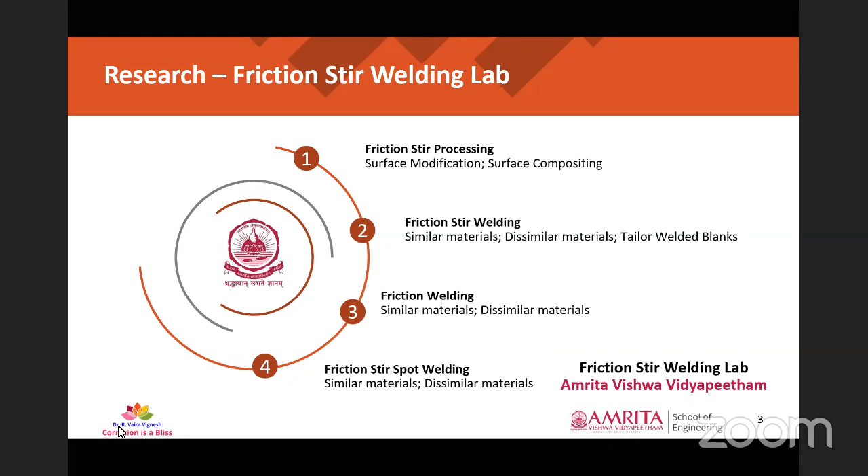The next lab I am associated with is the Materials Processing Lab, established with support from Amrita Vishwa Vidyapeetham, the Department of Space, and ISRO. We have facilities for powder metallurgy of materials, fabrication of ceramic tiles and ceramic polymer pavement blocks, and facilities for hot rolling and cold rolling of materials. Besides this, we work on vacuum brazing of materials. Dr. M. Govindaraju sir is an expert in vacuum brazing of ceramics to alloy, and he currently has 2 research-funded projects live in the lab.

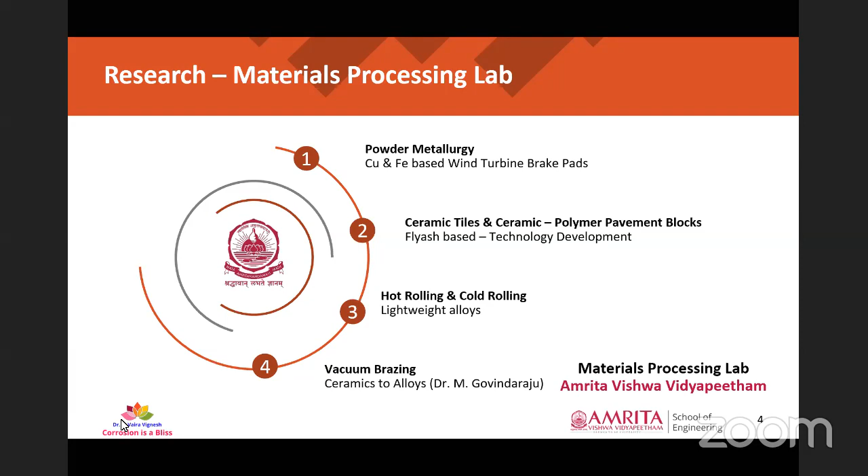These are the facilities we have in our lab: friction stir welding and processing setup, immersion corrosion setup with thermostatic bath, continuous casting setup, multi-purpose heat treatment furnace, vacuum brazing furnace, high vacuum brazing furnace, high frequency induction furnace, rolling mill, ball milling unit, foil rolling unit, and conventional tribometer setup. These are established with funds from ISRO, the Department of Science and Technology, the Department of Space, and Amrita Vishwa Vidyapeetham.

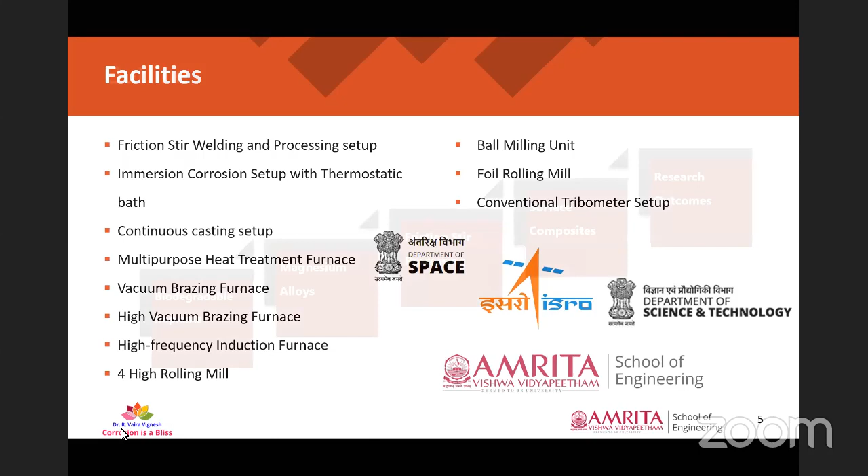With this brief introduction, I'll move into today's topic. I'll begin with an introduction to biodegradable implants and the need for implants with respect to magnesium alloys. Then we'll discuss the surface composite concept, followed by the research outcomes based on AZ91 alloy reinforced with nanophase silica particles.

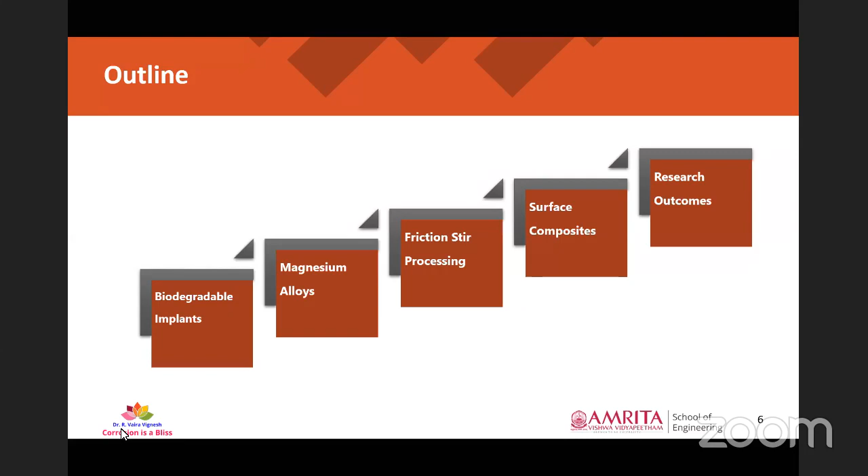A base introduction to biomedical implants and magnesium alloys.

Implants are materials engineered to interact with biological systems. They are utilized for hard tissue or bone fracture based applications, substituting and supporting the functionalities of the damaged bone.

Conventionally, implants are made of polymeric, ceramic, or metallic materials. A few polymeric materials used for implant applications include polyethylene, polyketones, polylactide, and PGA based derivatives. The problem with these polymeric implant materials is their limited biocompatibility.

Coming towards ceramic materials, alumina, silica, zirconia, and hydroxyapatite based ceramic materials are into the picture if we want an implant material based on ceramics. But the problem with ceramics is their machinability.

Coming towards metallic implant materials, researchers and medical people have been using stainless steel based, chromium, tungsten, and titanium based alloys for implant applications.

However, when we check the properties of these conventional materials with the bone, given in the table here, we could observe that the density, compressive yield strength, and Young's modulus of these conventionally used metallic implant materials are very much higher than that of the bone.

If we place a material that has undesirably high strength and high Young's modulus, it will create a high tendency for the implant material to absorb the stresses transmitted to that specific area of the body, and this will induce a body mechanism to reabsorb the developing bone material, which deteriorates the bone density of the developing bone.

This accretive process, that is the tendency of the implant material to absorb stresses and the induction of the body mechanism to reabsorb developing bone material, will lead to loosening of the implant and bone refracturing. This effect is called the stress shielding effect, so it is not desirable at all.

Added to that, these implants are always non-biodegradable, meaning they will not corrode inside the human body. For example, it can be stainless steel, titanium, or any other material—it will not degrade in vivo. So there is a need for secondary revision surgery after the bone heals completely.

Added to that, since these are non-biocompatible elements—for example, titanium and stainless steel are not biocompatible—in the case of stainless steel, iron and chromium are the ions released. If they corrode or make wear debris, they are non-biocompatible, and that will release toxic ions in the vicinity of the implants, leading to inflammatory osteolysis.

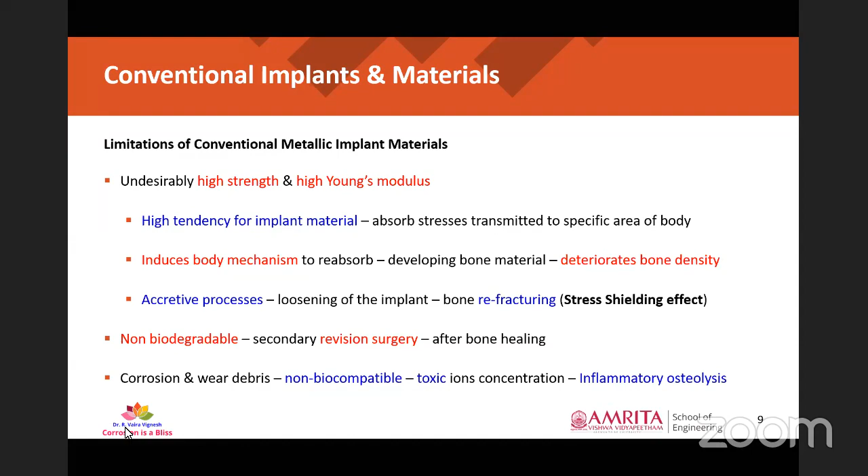Coming towards biodegradable concepts, people have been working on these biodegradable concepts right from the 1850s, and these biodegradable implants should have the inherent ability to corrode in the human physiological environment.

But the problem with currently used biodegradable implants is they prematurely fail before the bone heals completely. So we have to develop a material with an elongated dissolution period, so that the bone healing period and the biodegradable implant's dissolution meet at an exact point. We must ensure the implant has gradual loss in material and mechanical strength during degradation, balanced by the increasing strength and stability of the newly forming bone.

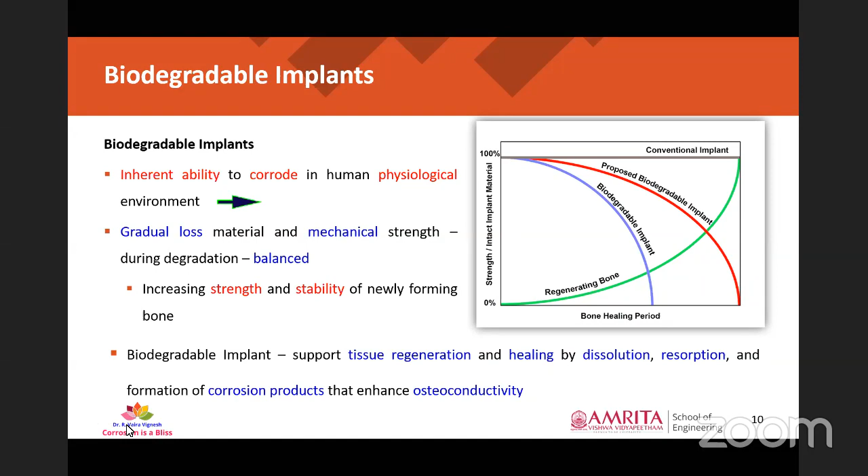When we consider these factors, magnesium has many advantages over conventional materials. First is density, compressive yield strength, and Young's modulus. The density of human cortical bone and magnesium alloys are very similar, and the compressive yield strength and Young's modulus are also very similar to magnesium alloys in most cases. This equivalent compressive yield strength, Young's modulus, and density will give us only marginal stress shielding effect if implanted in the human body.

Magnesium has an inherent ability to corrode in the human physiological environment, which is rich in chloride ions. Even so, this creates magnesium ions, which are cofactors of more than 325 enzymatic reactions within the human body, ensuring proper functioning of internal organs. The serum magnesium levels are maintained by dynamic absorption and excretion equilibrium mechanisms within the body. The World Health Organization recommends a daily intake of 280 to 300 milligrams of magnesium-based salts for adults and 250 milligrams for children.

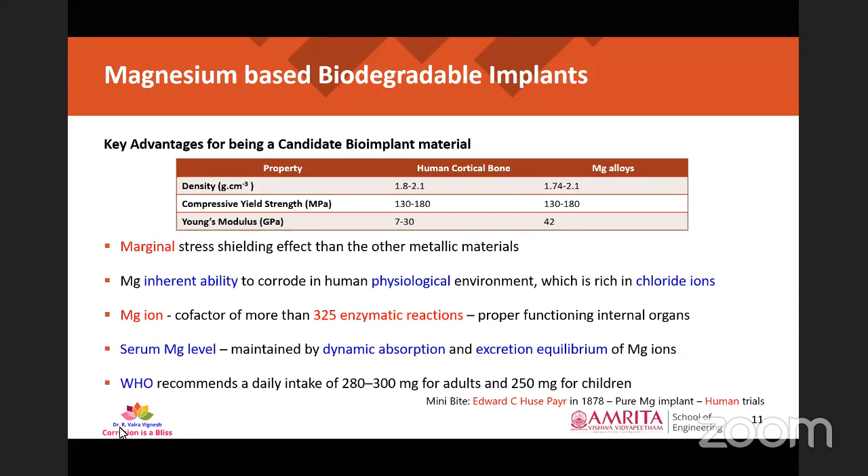This led to research towards biodegradable implants with controlled corrosion kinetics in magnesium alloys. The challenge of magnesium alloys for bioimplant applications is its HCP structure, which limits the workability of the material since the slip systems are very limited. Additionally, it is a highly active metal resulting in high corrosion rate, and its low density results in high wear rate too. Magnesium has a density of around 1.7 grams per cc.

Coming to the corrosion perspective, magnesium alloys corrode rapidly at a pH of around 7.2 to 7.4, the pH of physiological fluids, at a rate of 4 to 8 mm per year. But the recommended corrosion rate for biodegradable implants is around 0.5 mm per year. At a corrosion rate of 4 to 8 mm per year, this results in accumulation of hydrogen gases in the tissues, which is a lethal phenomenon.

So we need to develop a process or a composite that will engineer the corrosion properties of the materials. The bioimplant recommended corrosion rate is less than 0.5 mm per year. So we have to develop a process or composite to engineer the corrosion properties.

The limitations with these magnesium alloys also have to be considered while we choose a process or plan for fabrication of a composite material.

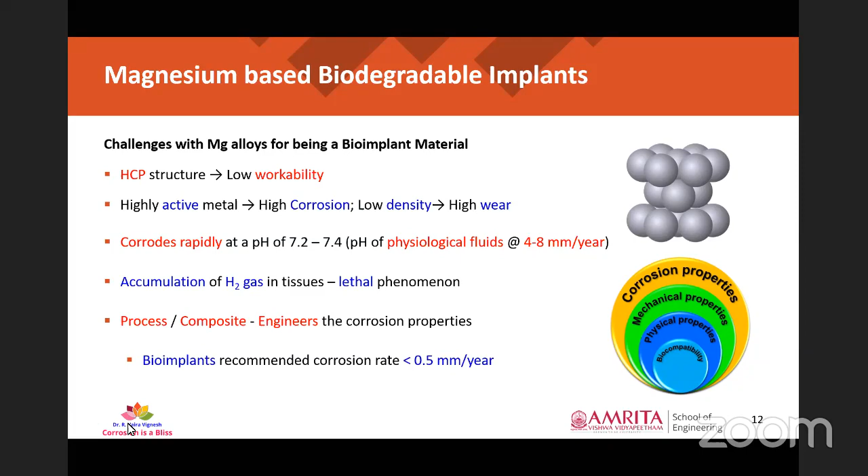Among the magnesium alloys, my research topic will include AZ91, which is a magnesium aluminum alloy system. Earlier researchers have shown that this specific grade of magnesium aluminum alloy system has good biocompatibility and corrosion resistance in vivo environments.

In vivo animal studies, in vivo based corrosion rate experiments indicated that the corrosion rate of AZ91 is less than the in vitro corrosion rate, which is based on some cell culture based experiments.

So in this study, we have taken a wrought AZ91D alloy of thickness 4 mm, whose composition is given here. AZ91, as you know, is magnesium 90%, aluminum around 9%, and zinc 1% approximately. This is the spectrometer reading showing the composition of wrought AZ91 alloy purchased from the market.

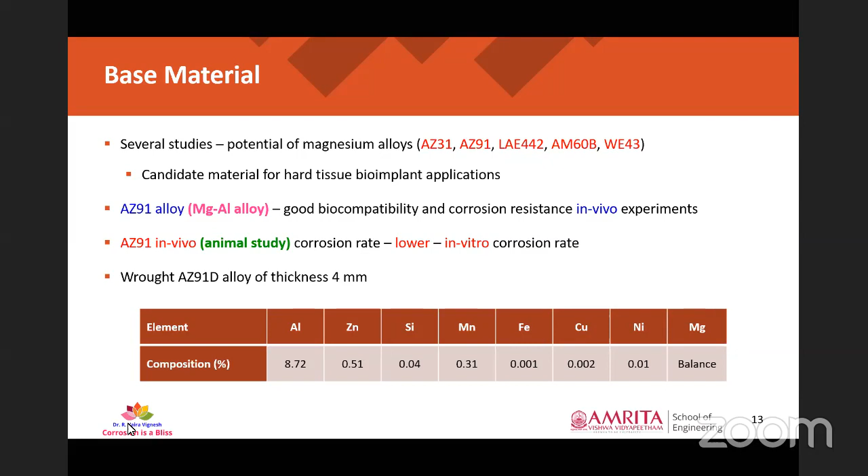So we are going ahead with fabrication of composite using this material. Let us see the phases present in this magnesium aluminum alloy system so we can conclude how it could be done, and what parameters we should consider while fabricating magnesium aluminum based surface composites.

The solubility of aluminum in magnesium is very limited, and we can see from the phase diagram that only 11.5% of aluminum dissolves at eutectic temperature. Beyond this solubility limit, magnesium 17Al12, a brittle intermetallic precipitate, comes out of the alloy, and that is thermally unstable too.

Coming towards corrosion perspective, the alpha magnesium, the primary phase of the alloy, has corrosion potential of minus 1.81 volt against saturated calomel electrode in Hank solution, and the beta phase, the secondary intermetallic phase present in AZ91 alloy, has corrosion potential of minus 1.08 volt against saturated calomel electrode in the same Hank solution.

So when two phases are present in the matrix with wide gap in corrosion potential, this leads to galvanic coupling effect, which in turn leads to intergranular corrosion effects too. So we have to ensure the intergranular corrosion effect is minimized while we fabricate surface composites. We have to consider this point of view also.

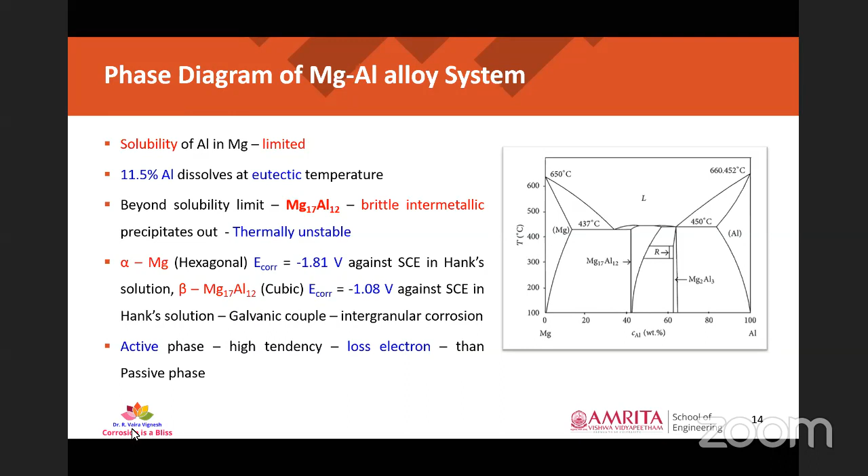Coming towards its soft matrix and HCP structure, it is prone to high wear rates. Added to that, the HCP structure restricts the deformation of the alloy too.

Coming towards tensile behavior, it has a soft matrix, and this soft matrix grain size will determine the tensile strength of the alloy. So if we want to improve the tensile characteristics, we have to opt for grain refinement techniques too.

Coming towards biocompatibility, that is a plus point for us because magnesium is the second most abundant element in the human body, and excess is excreted through body fluids.

When we combine these factors like tensile and corrosion, that gives us stress corrosion cracking; corrosion and wear gives tribo corrosion; and tensile behavior combined with biocompatibility comes with stress shielding effect.

These characteristics are all dependent on the microstructure of the alloy, which consists of alpha phase and beta phase. The alpha phase is the primary phase of AZ91, which is alpha magnesium, and the beta phase is an intermetallic of magnesium and aluminum in the alloy itself.

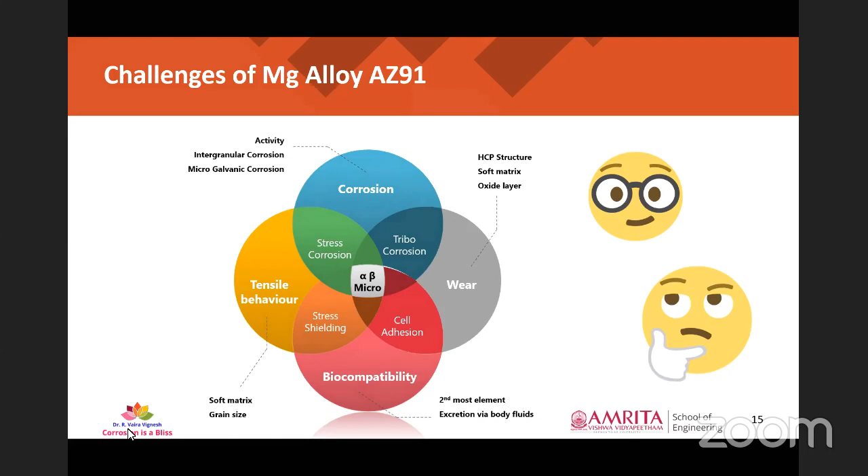And we'll discuss the solid state processing technique, that is friction stir processing technique, to fabricate surface composites out of magnesium alloy AZ91.

Coming towards friction stir processing, it is a solid state processing technique, because we process the material well below its melting point. Added to that, it is a green process too.

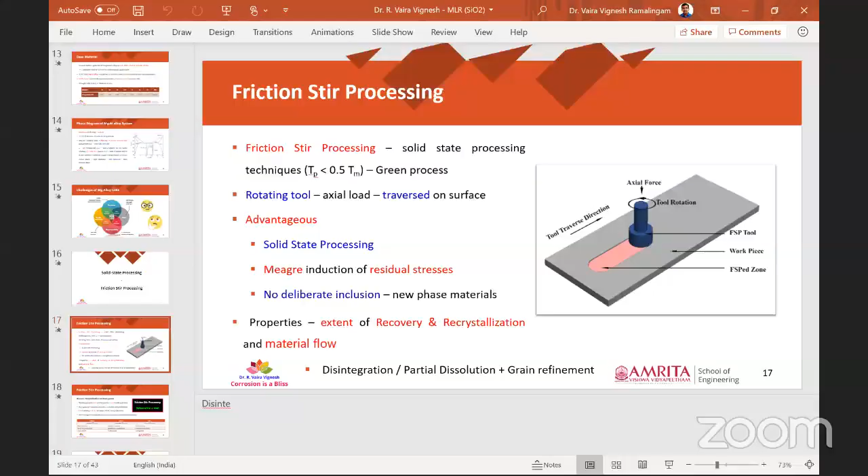Yes, can I go ahead with this FSP? Yes, yes, sir. Yes, ma'am.

So the disintegration and partial dissolution happens. Why? Because there is recovery and recrystallization phenomenon taking place in the material.

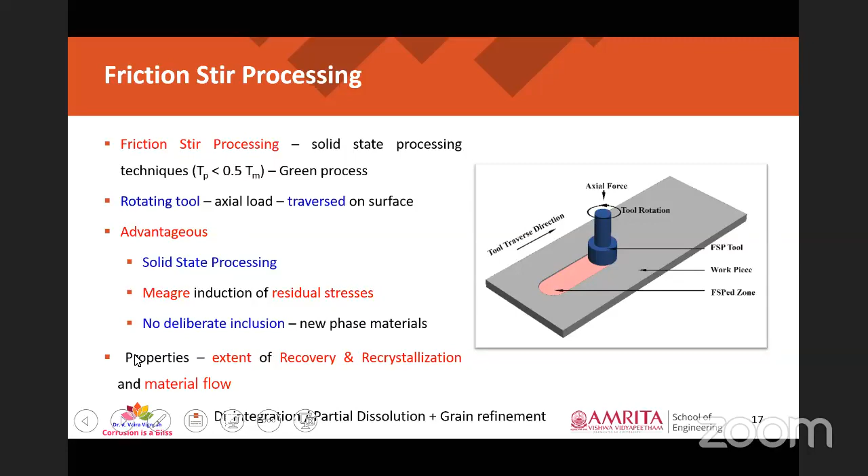Coming towards the recovery, recrystallization, and grain growth process that happens in FSP, we can differentiate it into three zones. One is exactly beneath the FSP tool, which undergoes dynamic recovery, dynamic recrystallization, and grain growth. The zones ahead and behind the FSP tool are subjected to static recovery, static recrystallization, and grain growth phenomenon.

Generally speaking, materials working processes could be classified as hot working and cold working. In hot working, grain structure refinement happens through heat input, and in cold working, through strain. In hot working, dynamic recovery and dynamic recrystallization take place, and in cold working, static recovery and static recrystallization take place.

But FSP is unique. Why? Because we introduce heat and strain into the matrix simultaneously, so that dynamic and static based recovery and recrystallization phenomena take place in the material simultaneously. This is the greatest advantage of this FSP process.

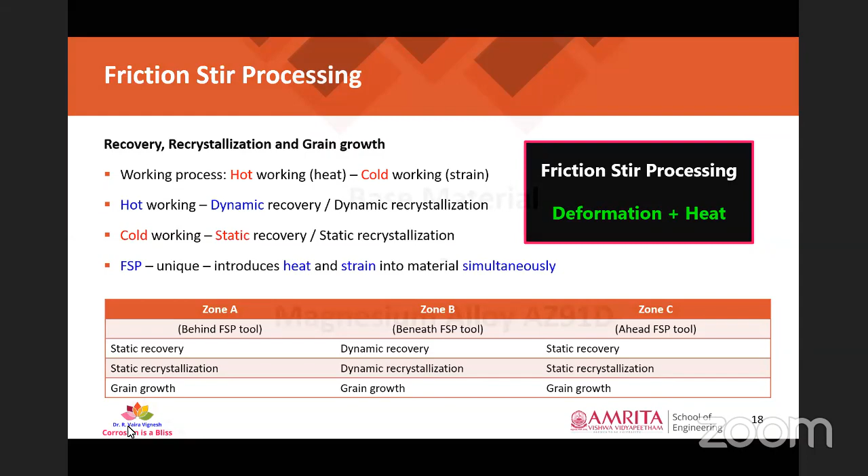So we'll be using this process to fabricate surface composites out of magnesium alloy using nanophase silica particles. Even before that, we'll discuss the properties of the base material, that is magnesium alloy AZ91D.

Coming towards the microstructure observed under a normal microscope, we could see alpha phase and beta phase in the alloy. The alpha phase appears as a bright region, and the beta phase appears as a dark region in the optical microscope after etching.

We have done some XRD analysis to confirm the phases present in the matrix. The XRD analysis confirmed that there are only two predominant phases in AZ91 alloy: alpha magnesium, which is the primary phase, and the intermetallic phase between magnesium and aluminum, beta magnesium 17 Al12. So these are the two phases present in the alloy.

The micro hardness of this alloy in the as-fabricated state is around 57.9 HV, that is Vickers hardness of 57.9 HV.

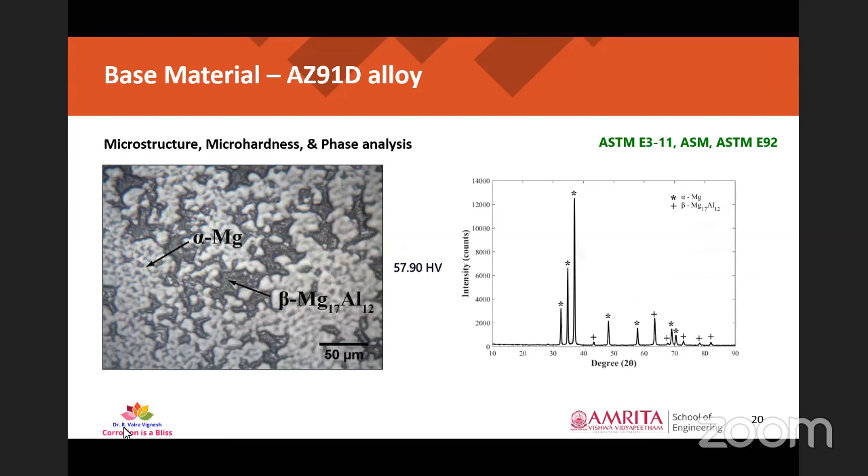For performing the immersion corrosion test, we followed ISO 10993-15 standards, where we had to simulate a normal human environment, maintaining a temperature of around 37 plus or minus 0.1 degrees Celsius.

The corrosion test was done for a period of 7 days. After performing the test, the corroded specimens were cleaned using chromic acid, prepared by mixing 100 grams of chromium oxide in 1000 ml of distilled water. This was used to remove the corrosion products from the surface of the material.

Initially, the corrosion rate of the material increased to 4.37 mm per year after the first day of corrosion. With increase in immersion time, the corrosion rate stabilized at around 1.05 mm per year after 144 hours of immersion, that is after the 6th day. So we could generally see the corrosion rate of the material.

So obviously we have to go for a process to engineer the corrosion rate for biodegradable implants. That is what we have concluded.

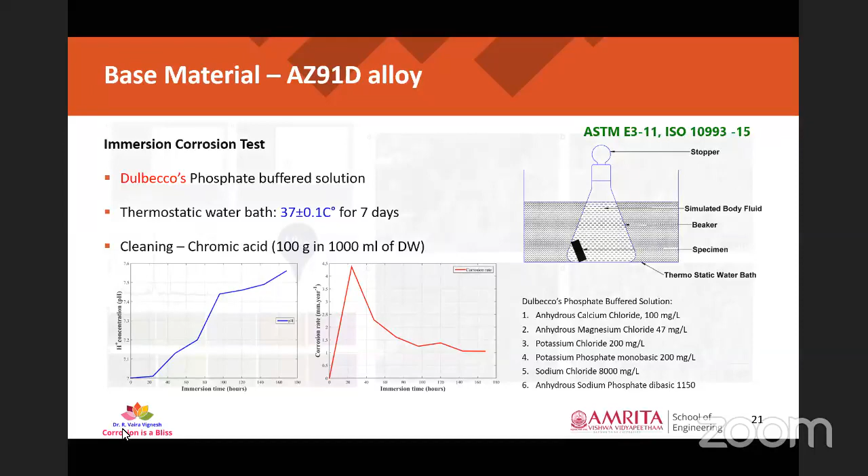Initially, after the first day of immersion, we observed a cracked surface which widened with immersion time in the normal magnesium alloy. Added to that, we observed flower-like clusters that bloomed over the surface of the specimen with increase in immersion time.

So we have taken some EDS analysis first. The EDS analysis confirms that the corrosion product is rich in elements of magnesium, sodium, calcium, phosphorus, chlorine, and oxygen. Specifically, the calcium to phosphorus ratio of these corrosion products changed from 2.15 initially to 1.65 after 7 days of immersion.

Why am I speaking about this calcium to phosphorus ratio? Because this ratio gives us an idea whether hydroxyapatite precipitates over the surface after immersion or not. This hydroxyapatite is a mimic of the bone material, so if it completely spreads over the surface, it will enhance osteoconductivity too. So for this base material, we can conclude that since there is precipitation of hydroxyapatite based crystals over the surface, the magnesium alloy is deemed to be osteoconductive and biocompatible. Previous studies have shown that if hydroxyapatite forms over the implant material, it will support bone growth and implant-bone integration, because it is the natural constituent compound of human bone.

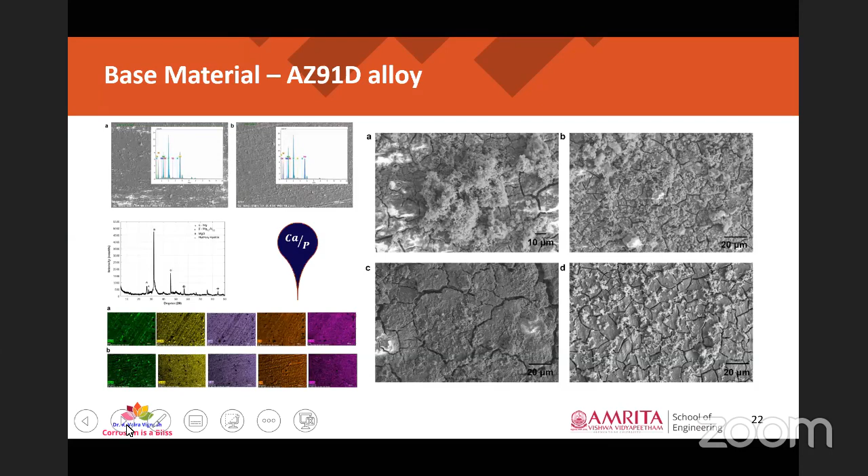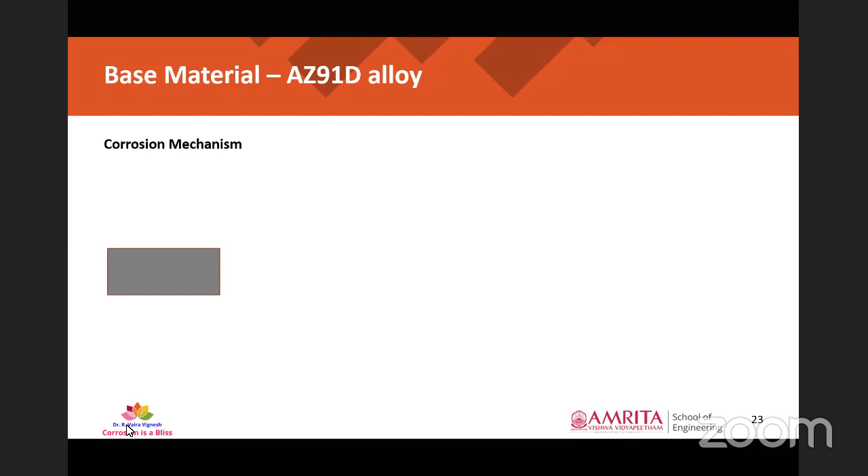So once the material is immersed in the normal human body solutions, it will develop a layer of magnesium oxide. This magnesium oxide will be converted into magnesium hydroxide because it is present in an aqueous solution. So the dissolution of magnesium ions and formation of magnesium hydroxide takes place, and this magnesium hydroxide is a very active compound. It will act as a potential barrier to absorb calcium and phosphorus. This magnesium hydroxide will react with chloride ions present in the DPBS, or Dulbecco's phosphate buffered solution, that we have created to mimic the human body environment. The chloride ions are attracted toward this magnesium hydroxide, reacting to form magnesium chloride, which goes into solution because it is a highly soluble salt.

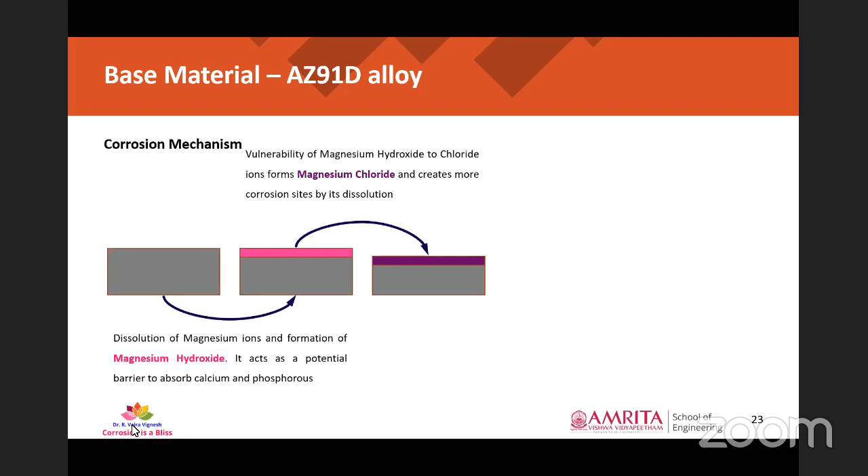After that, the magnesium has more access to phosphate and calcium based ions. So next, what it forms is flower-like clusters. These flower-like clusters are just phosphate salts of calcium and magnesium, and these phosphate salts are nothing but hydroxyapatite crystals. The formation of such crystals over time, after 7 days of immersion, confirms that there is an adherent layer of corrosion products based on calcium hydroxyapatite or calcium magnesium phosphate layer, which is very much essential for implant based applications.

So this is the big picture: once we immerse magnesium alloy into the body, there will be formation of a magnesium oxide layer. Then, because of the aqueous environment, magnesium hydroxide forms. Magnesium hydroxide is very active, so it reacts with chloride to form magnesium chloride, which goes into solution because of its highly soluble nature. Then, because of the high accessibility of magnesium with phosphate and calcium elements present in the human body or this Dulbecco's phosphate buffered solution, it forms calcium hydroxyapatite crystals or calcium magnesium phosphate based crystals, which will enhance the osteoconductivity also.

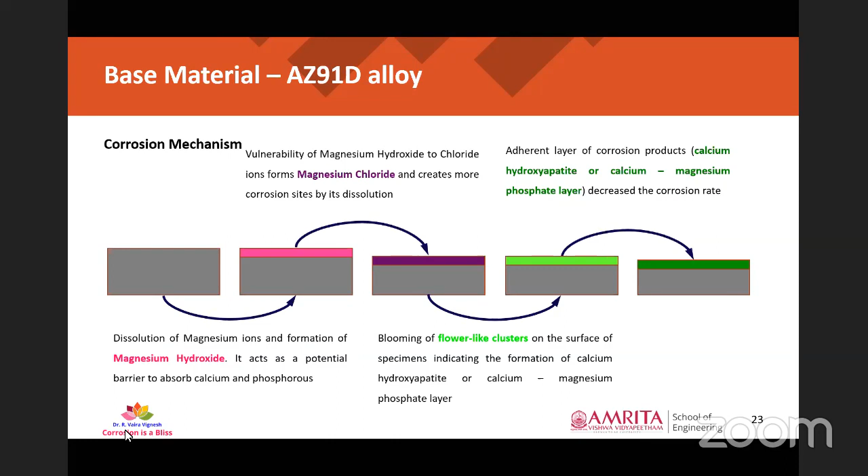But the corrosion rate of this specific alloy is around 4.37 mm per year, which is not recommended. That is why we have to go for a process that will engineer the corrosion rate of this material specifically. We have done electrochemical corrosion tests to assess the corrosion rate and corrosion potential of this material, which I'll detail with respect to the AZ91D silica based composite. In this process, we have taken the base material and immersed it in a DPBS solution, which is Dulbecco's phosphate buffered solution, to mimic the human body environment.

The temperature was maintained at around 37 plus or minus 0.1 degrees Celsius. We have used platinum foil as our counter electrode and saturated calomel electrode as our reference electrode.

Then we have done potentiodynamic polarization test, and from that we have obtained corrosion potential and corrosion rate of these specimens. The characteristics of the anodic and cathodic parts will be detailed when we discuss this composite. From this we come to a conclusion that the corrosion rate of the specimens with this electrochemical corrosion test is around 4.49 mm per year, which is very close to the immersion corrosion results too.

So this is the basic results from the base material, that is AZ91D. From this we'll be going towards AZ91D plus nanophase reinforced, nanophase silica reinforced alloy.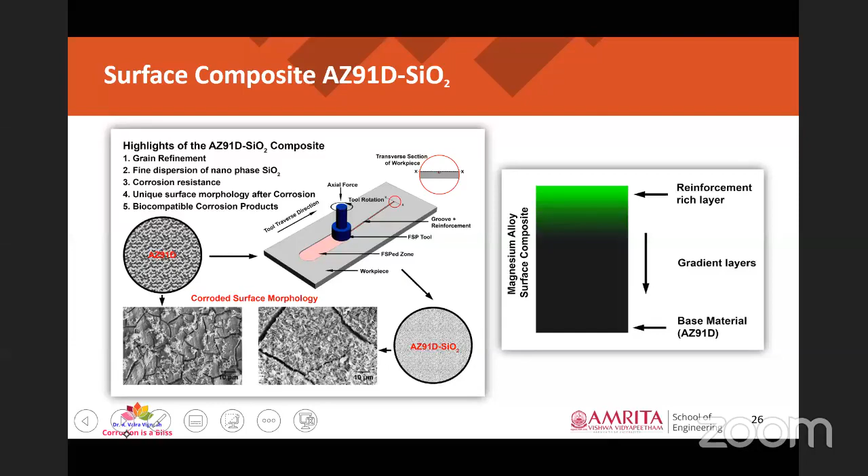From here we'll be discussing the fabrication of the surface composite. We have taken a workpiece of dimension 150 by 50 by 4 mm, and made a rectangular groove of 150 by 1 by 1 mm on the surface exactly at the middle. That groove was filled with nanophase silica particles and compacted using mechanical pressing techniques.

Then we have done a sealing pass. In the sealing pass, we take an FSP tool with a shoulder and without a pin, and just insert it over the surface so that it will inhibit the scattering of reinforcement particles when we exactly do the friction stir processing.

Then we have plunged the tool inside. After a dwell time of 30 seconds, FSP trials were carried out, and consecutive passes were done. For example, if doing one pass or two passes, it was done after a period of 60 minutes. So let's see the macro structure results over here.

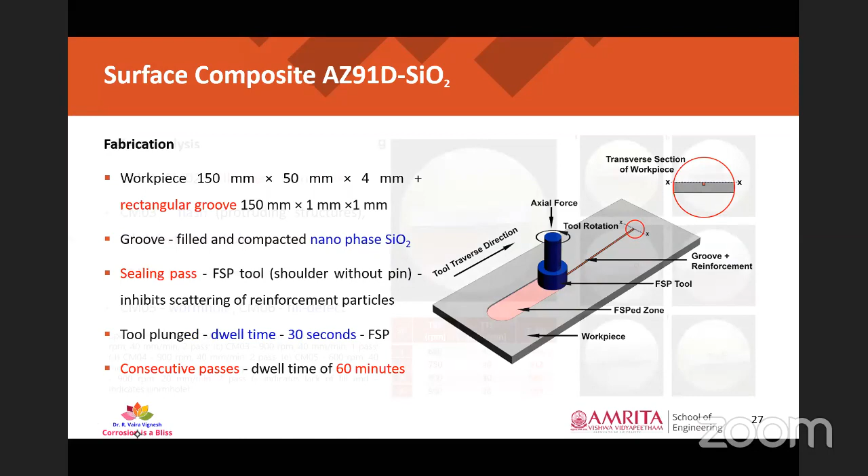We have done around 8 experiments to optimize the parameters: tool rotation speed and tool traverse speed. Specimen A, shown over here, which is CM01, was processed at process parameters of 750 rpm and 40 mm per minute for a single pass. In that, we have observed fill defects and wormholes too.

In case of CM02, which was processed at, in case of specimen 03, we have observed flash, fill defect, and wormholes in the material. You can observe all these defect features in the macro structure given over here. CM04 had flash, hole, and wormhole, processed at 900 rpm and 40 mm per minute. They too had defects related to wormhole and fill defect.

When we process the same material at 900 rpm, 20 mm per minute, and for 2 passes, we have not observed any defects internally or externally. There were no flash, no fill defect, and no wormhole. That picture is shown as G over here, where we could observe there is no defect present in the material in the lateral section and in the longitudinal section too.

In specimen CM07, we could see the stir zone, thermomechanically affected zone, and the base material zone. The TMAZ has equiaxed grains, and very fine grains, all because of the recrystallization phenomenon. This recrystallization is attributed to the pinning effect of nanophase silica particles, because these particles nucleated magnesium grains during recrystallization and also restricted the growth of recrystallized magnesium grains, as indicated in the existing literature.

So these are the things that made the material have a refined grain structure, with low average grain size diameter, and second, we had completely dispersed beta phases. This was observed under transmission electron microscope.

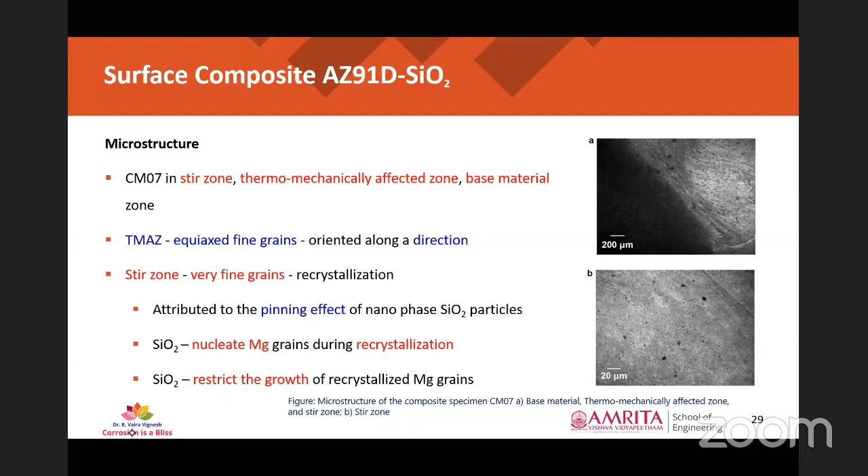The results are given in the next slide. We could see the images from high resolution transmission electron microscopy. Here we could observe the grain boundary, partial dislocations, and dislocation tangles present in the material. We could literally observe the nanophase silica particles and submicron beta phase particles present in the matrix in a completely dispersed manner.

So friction stir processing has helped us a lot in breaking and fragmenting this beta phase network and ensuring that we have subgrain formation too. This subgrain formation is very much essential for improving the mechanical properties of the material.

Added to that, we have observed a spot diffraction pattern of the phases present in this composite. The spot diffraction pattern also confirms that the bright region is magnesium, and the very small region is the nanophase silica, confirmed using this spot diffraction pattern. Submicron beta phase particles are also observed and confirmed through this spot diffraction pattern too.

These partial dislocations could be observed from the figure at the bottom rightmost corner, and we could observe the dispersion fashion of the silica particles and submicron particles in the grains too.

We have also confirmed the dispersion fashion through elemental mapping. The elemental mapping confirms that silica, shown as blue colored images, is completely dispersed in the matrix, and SiO2, in the sense silica, and the individual map of oxygen also confirms that it is completely dispersed in the matrix.

We have done XRD analysis to confirm the presence of silica, and that also confirms that nanophase silica is present in the composite material. So we have confirmed the grain refinement through microstructural analysis, through a normal microscope, transmission electron microscope, and XRD analysis too.

Coming towards the composite hardness, the base material hardness was around 57.9 Hv, but in the case of composite, in this stir zone, the composite had an average micro hardness of 75 Hv. This attests to the ability of the composite to resist plastic deformation, attributed to the presence of nanophase silica particles that act as barriers towards dislocation motion.

In the thermomechanically affected zone, because of the presence of elongated grains along a certain direction, there was a minor drop in microhardness values too.

From a corrosion perspective, when we compare the corrosion rate of the normal alloy and the composite: the composite had an average corrosion rate of 0.65 mm per year after 3 days of immersion, and after 7 days of immersion, the corrosion rate of this composite had reduced to around 0.26 mm per year.

When we observed the surface morphology under scanning electron microscope, we observed that the number of cracks present in the composite is fewer than that of the conventional base material, and the cracks were very narrow with respect to the base material too.

Added to that, the cracks have propagated and widened relatively in both specimens, whether base material or composite. The corrosion products have lesser volume in AZ91D, but the corrosion products were more in the case of this AZ91D silica based composite.

The distribution of corrosion products is scattered in the case of base material AZ91D, but in the case of composite, it is uniformly covered. Added to that, the structure of the corrosion product has changed from the base material towards the composite. In the case of composite, we had clusters of corrosion products.

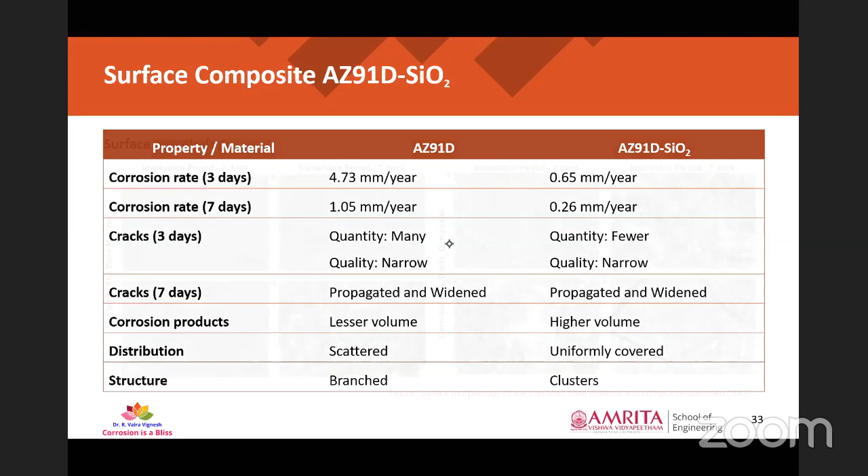So we can compare the surface morphology of the corroded base material and composite specimen here, with immersion periods of 3 days and 7 days given for reference. We could see that after 7 days of immersion, the composite specimen has uniform spread of corrosion products over the entire surface, whereas in the case of the normal base material AZ91D, we had only limited dispersion of corrosion products. That is why we had a high corrosion rate in this case of magnesium alloy.

But in case of this composite, because of the uniform formation of corrosion products, which is adherent in nature, that has limited the corrosion rate of the materials with respect to time. So these are the factors that have attributed towards the corrosion resistance of materials with increase in immersion time. So the corrosion products play a vital role in determining the corrosion rate of the materials too.

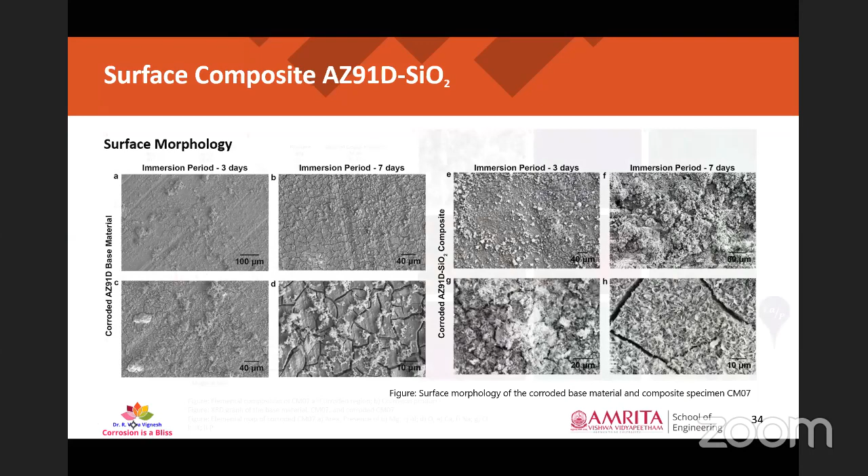So to analyze the corrosion products, again we have gone for elemental mapping, XRD analysis and EDS too. The EDS analysis has given us an idea that the calcium to phosphorus ratio is around 1.65, which means there is the formation of calcium hydroxyapatite crystals or calcium magnesium phosphate crystals in the material after 7 days of immersion. XRD analysis also confirms the presence of hydroxyapatite in the corrosion products of the composite material.

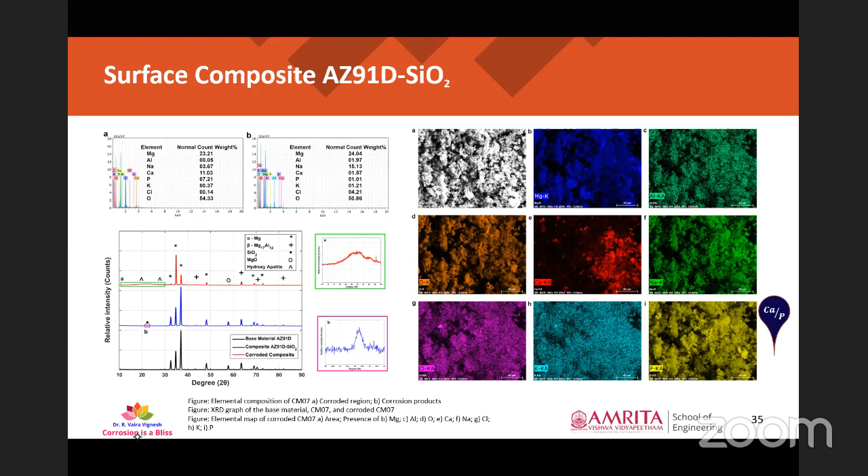Coming towards electrochemical corrosion characteristics, we'll just compare the base material and that of the composite one. The red colored line is the potentiodynamic polarization curve of the base material AZ91D, and the blue colored line is the potentiodynamic polarization curve of the composite material.

Speaking about the cathodic characteristics, the base material's cathodic kinetics and the composite's cathodic kinetics are very much analogous, very similar. This means there is minor effect or minor influence of nanophase silica particles on the cathodic kinetics of material. However, when we look upon the anodic dissolution characteristics, there is significant difference between the base material and the composite that we have developed.

In the case of AZ91D base material, once the potential is higher than that of the corrosion potential, there is an exponential increase in current, which means the anodic dissolution rate of magnesium is very much higher in the base material.

But in the case of composite, when we have a potential which is very much higher than the corrosion potential, denoted as Ecorr, we have a pseudo passivation tendency. We could literally observe a more or less horizontal line beyond which there is an increase in corrosion current of the composite. This indicates that the composite has a partially protective corrosion product film right between minus 1.30 volt and minus 1.145 volt. Beyond this 1.145 volt, there is a complete breakdown of the anodic dissolution of magnesium.

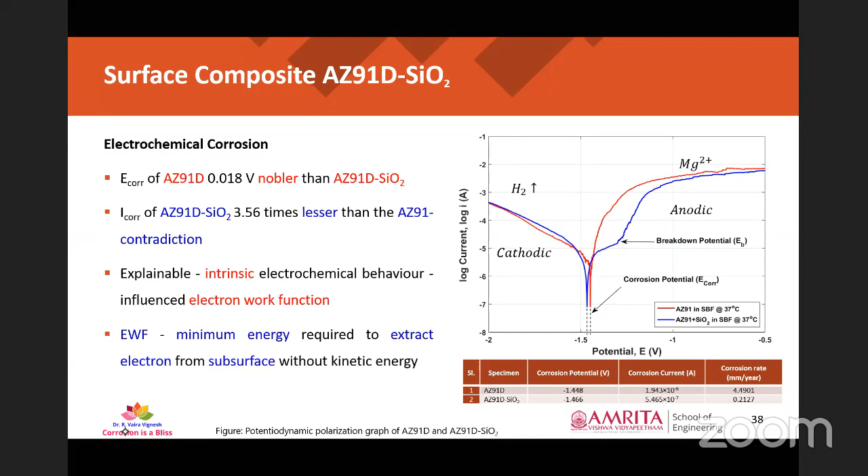When we have observed the surface potential of magnesium and silica, based on literature data, magnesium has an electron work function of 3.6 electron volt, and silica has an electron work function of approximately 4.8 electron volt. When we have low EWF, there is high tendency of electron to take part in electron reactions or chemical reactions. But in the case of AZ91D silica composite, we have finely dispersed silica on the surface, which retards the anodic dissolution rate of magnesium. Therefore, the corrosion rate of AZ91D silica composite is lower than that of the base material.

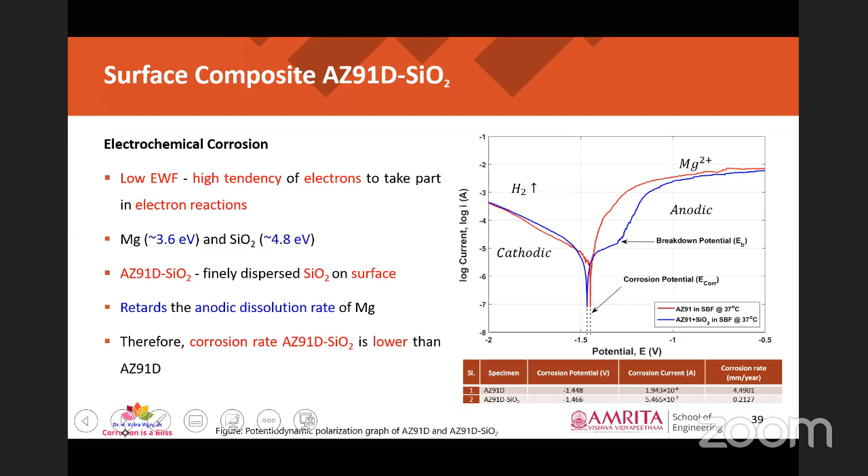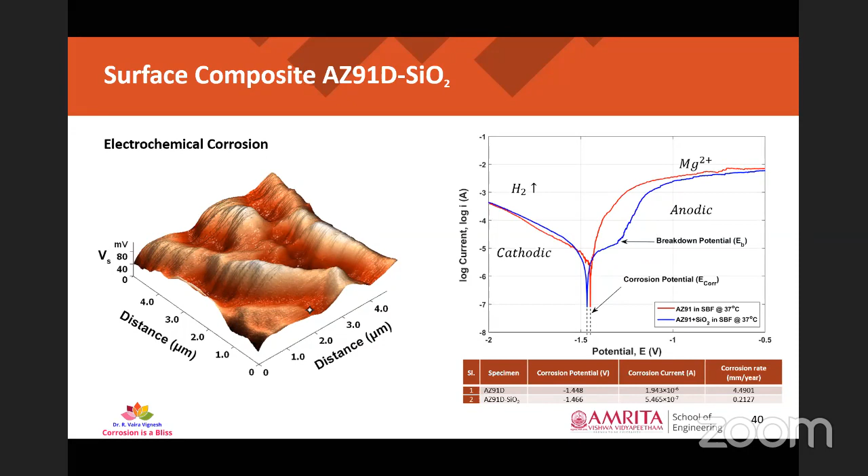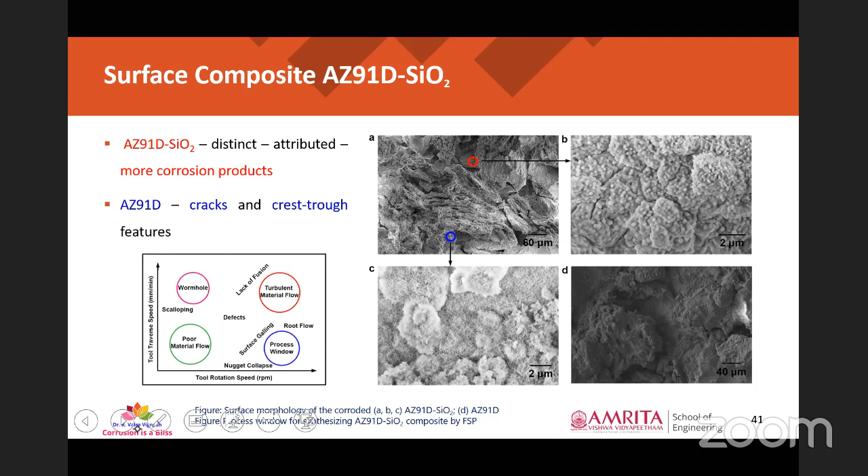So here are the brief outcomes of the research. We have fabricated the surface composite using nanophase silica on the surface of AZ91D by friction stir processing techniques. The metallurgical characterizations demonstrated the presence of refined grains, fragmented beta phase, and homogeneously dispersed nanophase silica particles, which have improved the mechanical and corrosion properties of the materials.

The refinement of grains is attributed to the capability of nanophase silica particles to nucleate magnesium grains during recrystallization and to restrict the growth of recrystallized magnesium grains. The corrosion test results indicate the formation of an adherent layer of calcium hydroxyapatite and calcium magnesium phosphate that reduces the corrosion rate of the material. Cumulatively speaking, this composite is an effective material for bioimplant applications.